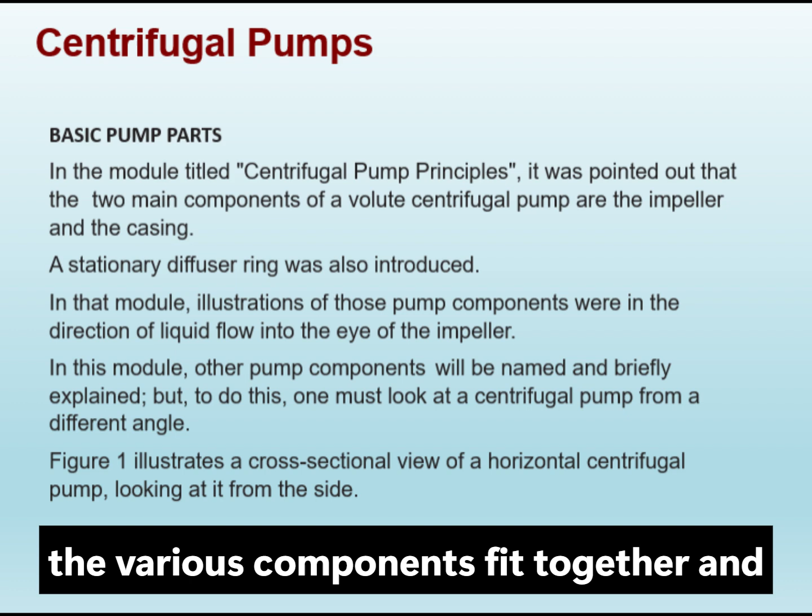In today's session, we will take a different approach and examine the pump from a cross-sectional side view. This perspective will allow us to see how all the various components fit together and interact within the pump assembly. Please direct your attention to Figure 1, which presents a cross-sectional view of a horizontal centrifugal pump as seen from the side. This diagram will serve as our primary reference throughout the remainder of this module.

Take a moment to familiarize yourselves with the general layout. You can see the casing forming the outer shell, the impeller mounted on the shaft at the center, and the various supporting components arranged around them. We will examine each of these components in detail as we progress through the session.

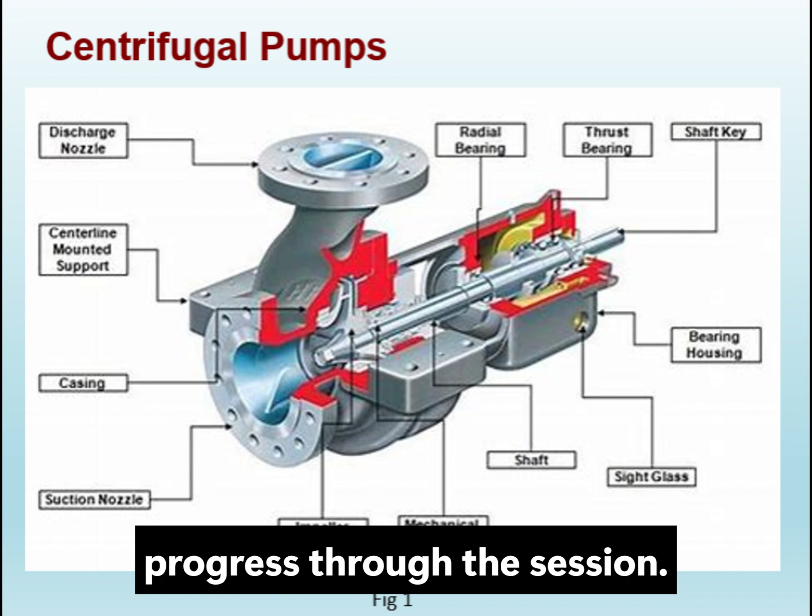Let us begin with the pump casing. The casing is the visible exterior structure of the pump and serves as the primary containment vessel. Most of the internal components, as well as the liquid being pumped, are enclosed within it.

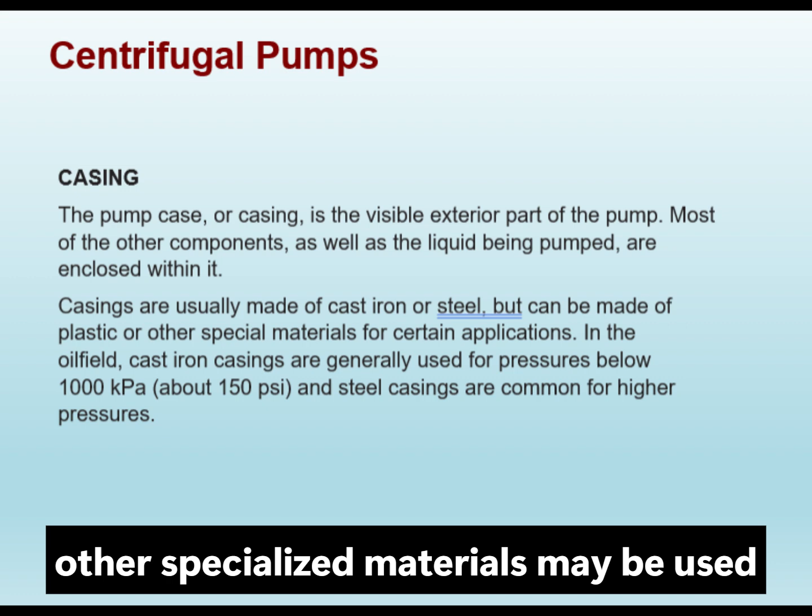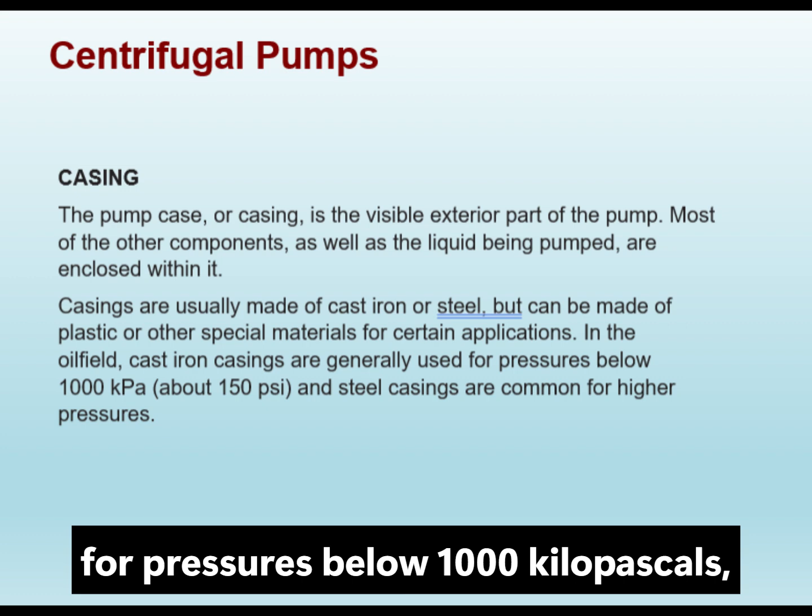Casings are manufactured from a variety of materials depending on the application. Cast iron and steel are the most common choices, although plastic and other specialized materials may be used in certain circumstances. In oil field applications, as a general guideline, cast iron casings are typically employed for pressures below 1,000 kilopascals, which is approximately 150 pounds per square inch. For higher pressure applications, steel casings are the standard choice.

Now, let us turn our attention to the impeller, which is arguably the most critical rotating component of the pump. The impeller is securely attached to the shaft and rotates at the same speed. There are three principal types of impellers, each with numerous design variations.

The open type features several blades attached directly to a central hub. The semi-open or semi-closed type incorporates a circular plate called a web on one side of the blades. The enclosed type, also referred to as a closed or shrouded impeller, has plates on both sides of the blades.

It is important to understand the performance trade-offs between these types. Closed impellers develop higher pressure, but have a lower flow rate and capacity. Open and semi-open impellers are better suited for pumping slurries, as larger particles can pass through more easily. In most oil field applications, impellers are manufactured from cast iron, though stainless steel, plastic, or other specialized materials may be used for corrosive or chemical service.

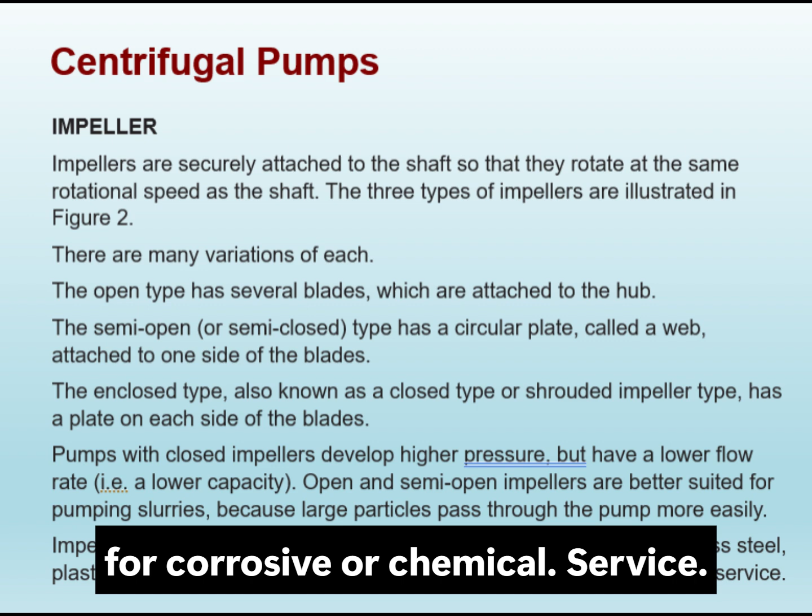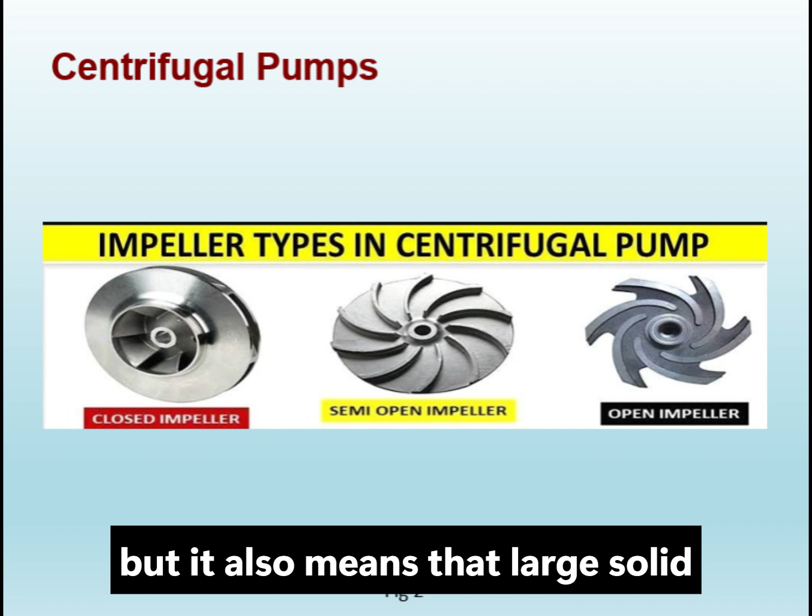Note how each successive design provides greater containment of the liquid flow path. This increased containment is what allows closed impellers to develop higher pressures, but it also means that large solid particles cannot pass through as easily.

The shaft is the component that transmits rotational energy from the driver to the impeller. It is typically connected directly to the driver through a coupling arrangement. Shafts are generally manufactured from steel to provide the necessary strength and rigidity.

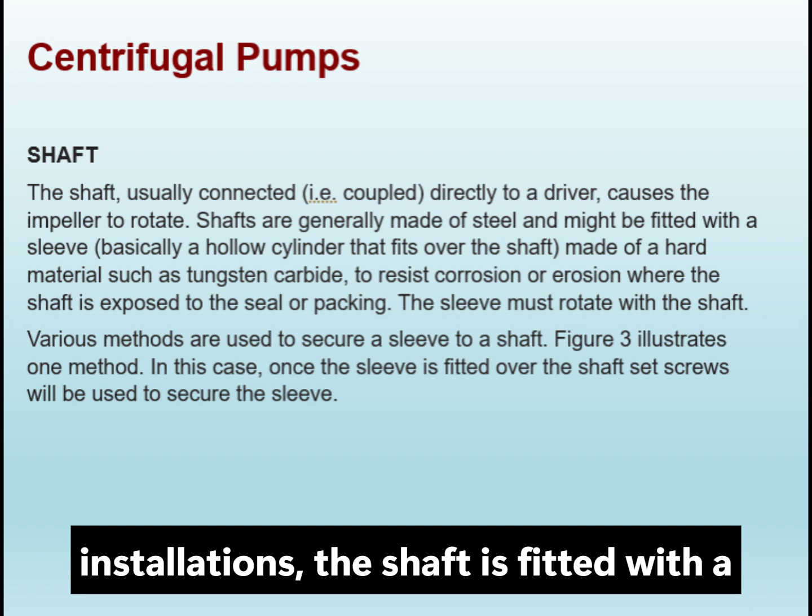In many installations, the shaft is fitted with a sleeve, which is essentially a hollow cylinder that fits over the shaft. These sleeves are typically made from a hard, wear-resistant material such as tungsten carbide. Their purpose is to protect the shaft from corrosion or erosion in the areas where it is exposed to the seal or packing. The sleeve must rotate with the shaft as a single unit.

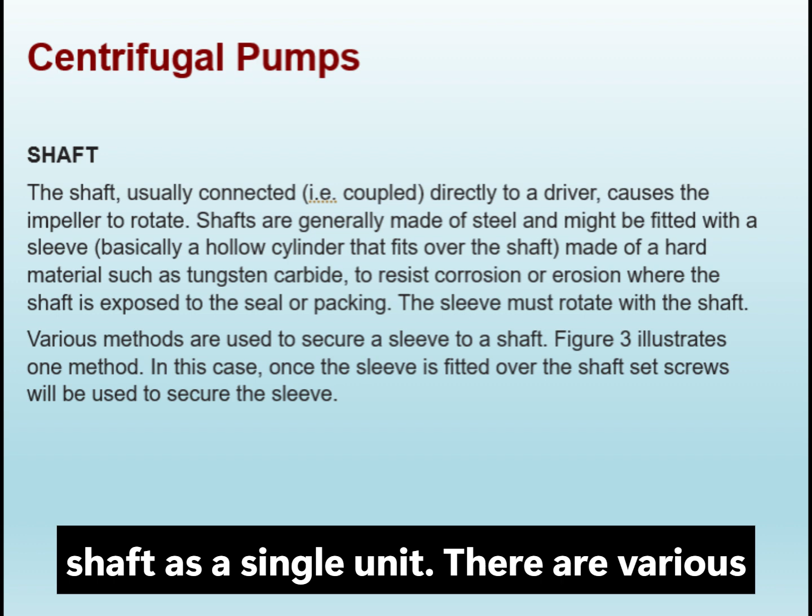There are various methods used to secure a sleeve to a shaft, and Figure 3 illustrates one such method using set screws. Continuing with shaft components, Figure 3 also illustrates another important method of securing rotating components to the outside of the shaft, using a device known as a key. In the illustration, you can see how the impeller is secured using this method.

A slot called a keyway is machined into the shaft, and a small piece of metal called a key is fitted tightly into this keyway.

The impeller hub is machined to slide over both the shaft and the key, creating a positive mechanical connection that prevents relative rotation between the shaft and impeller. Figure 4, which shows this arrangement from the end of the shaft, makes this relationship clearer.

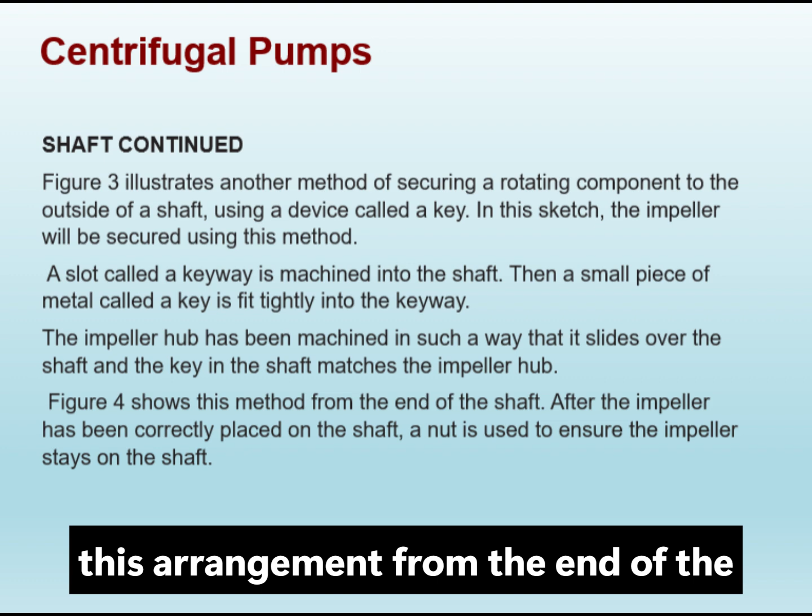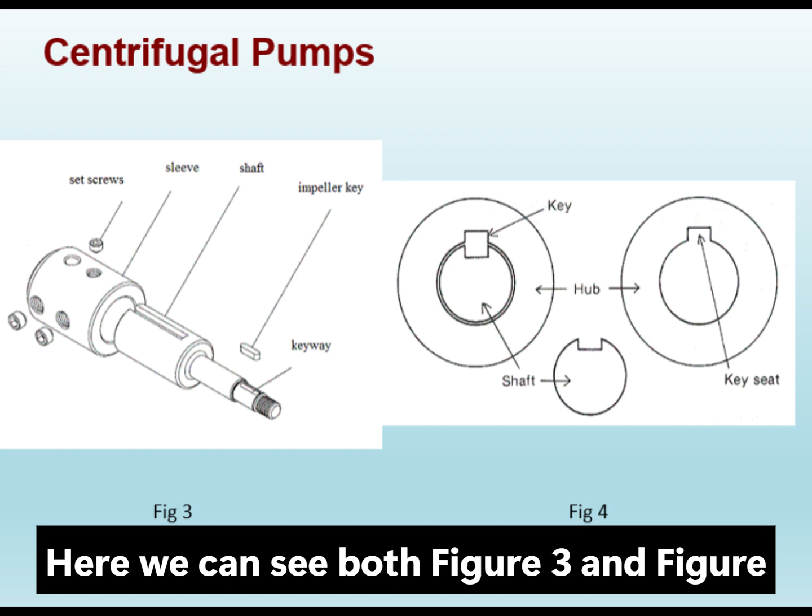Once the impeller has been correctly positioned on the shaft, a nut is used to ensure it remains securely in place. Here we can see both Figure 3 and Figure 4 together. Figure 3 shows the sleeve and key arrangement from a side perspective, while Figure 4 provides an end-on view of the shaft showing how the key fits into the keyway.

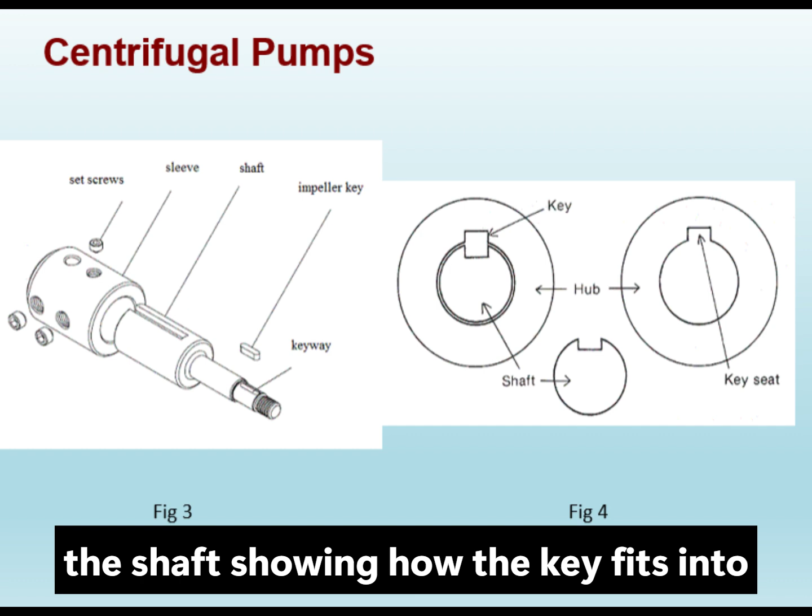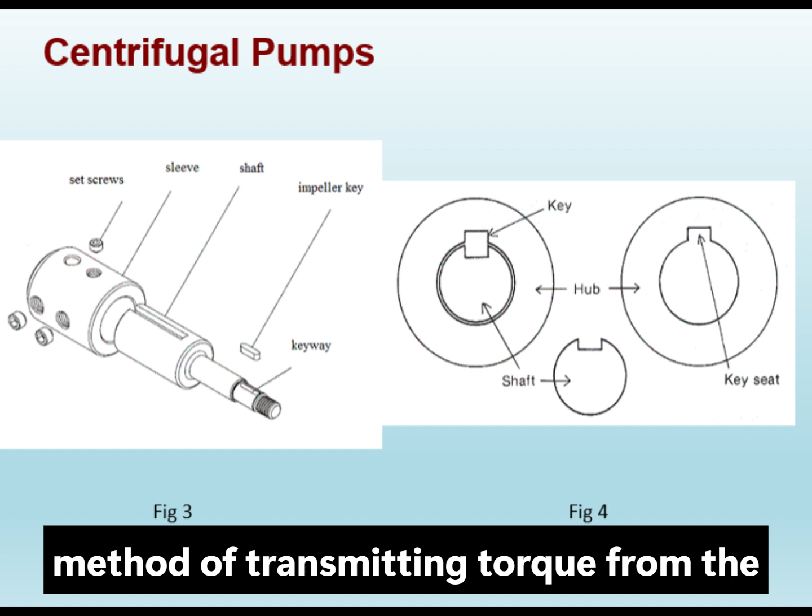Notice how the key creates a mechanical interlock between the shaft and the component being secured to it. This is a reliable and widely used method of transmitting torque from the shaft to the impeller while still allowing the impeller to be removed for maintenance when necessary.

We now move on to an important protective component, the wear ring. Once a pump is assembled, there is very little clearance between the impeller and the casing. If the impeller were to make contact with the casing during operation, the resulting damage could be extremely costly.

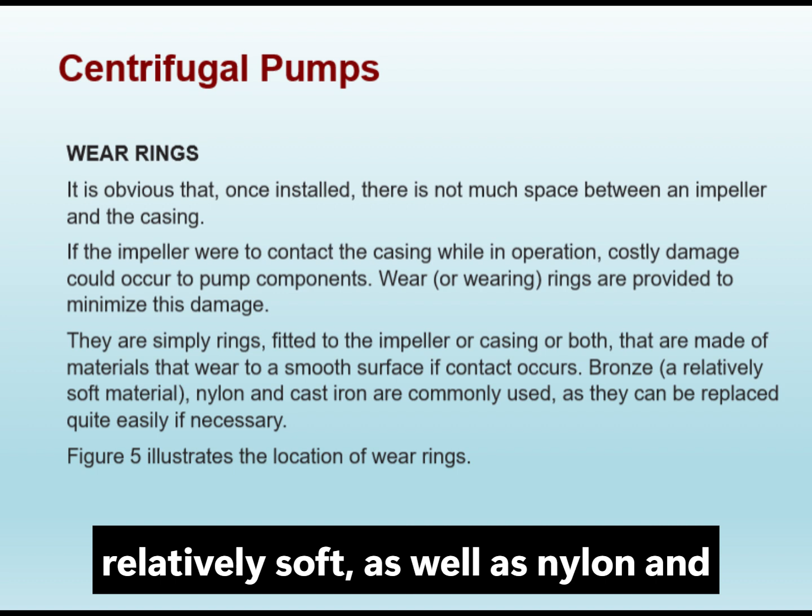Wear rings, sometimes called wearing rings, are designed to minimize such damage. They are fitted to the impeller, the casing, or both, and are made from materials that wear to a smooth surface if contact occurs. Common materials include bronze, which is relatively soft, as well as nylon and cast iron. These materials are chosen because they can be replaced quite easily when they become worn.

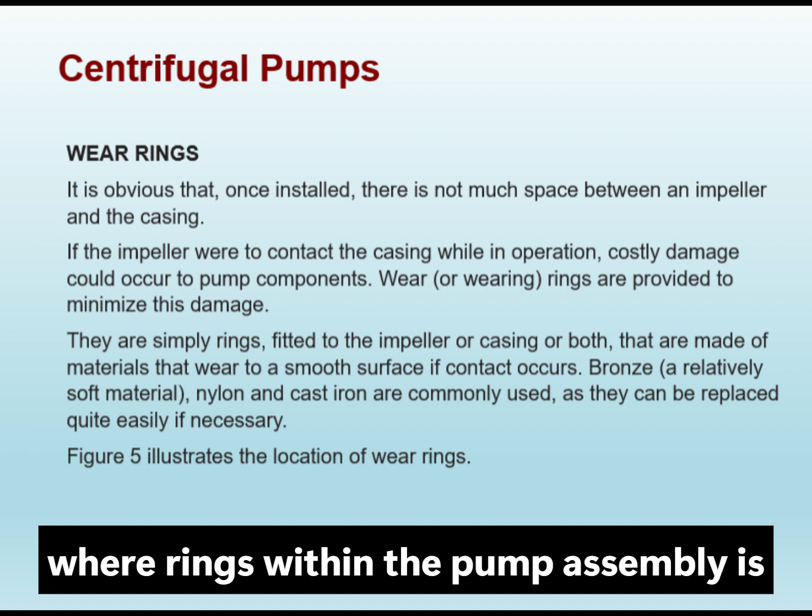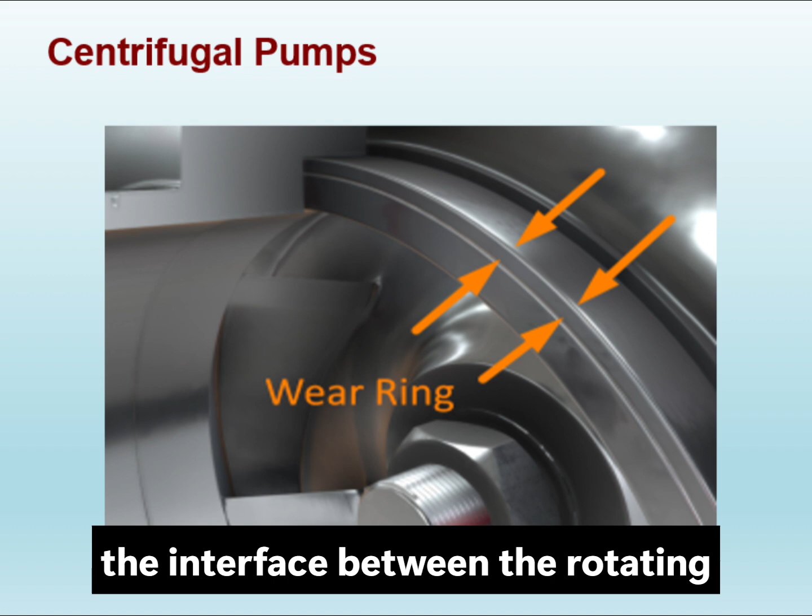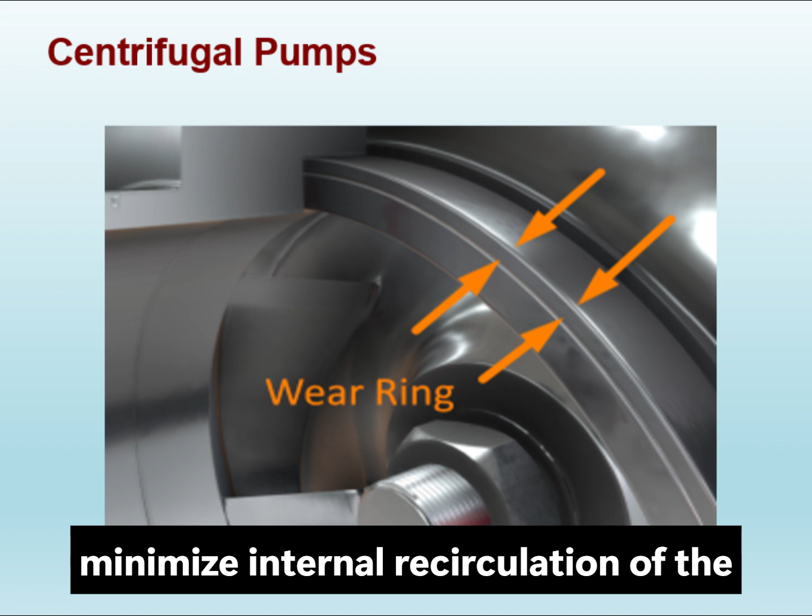Their precise location is critical to pump performance, as they must maintain a very small but consistent clearance to minimize internal recirculation of the pumped liquid whilst preventing metal-to-metal contact between the impeller and casing.

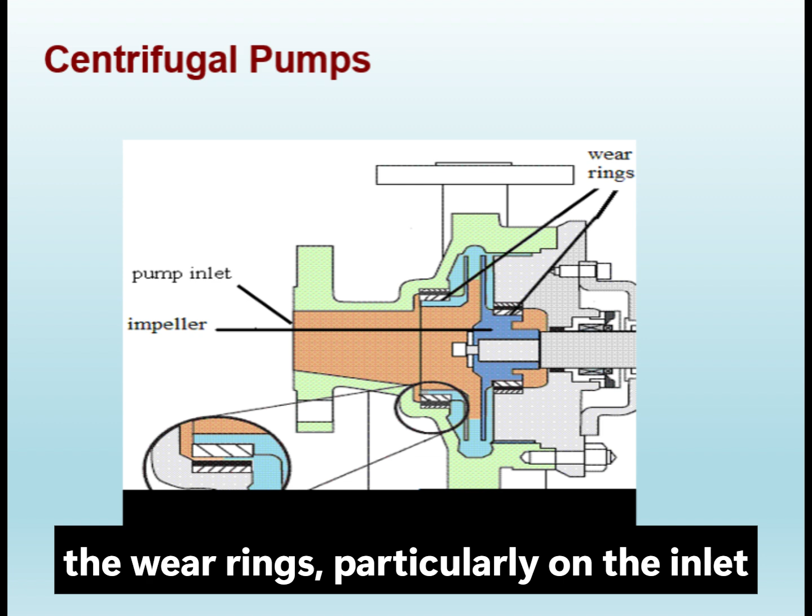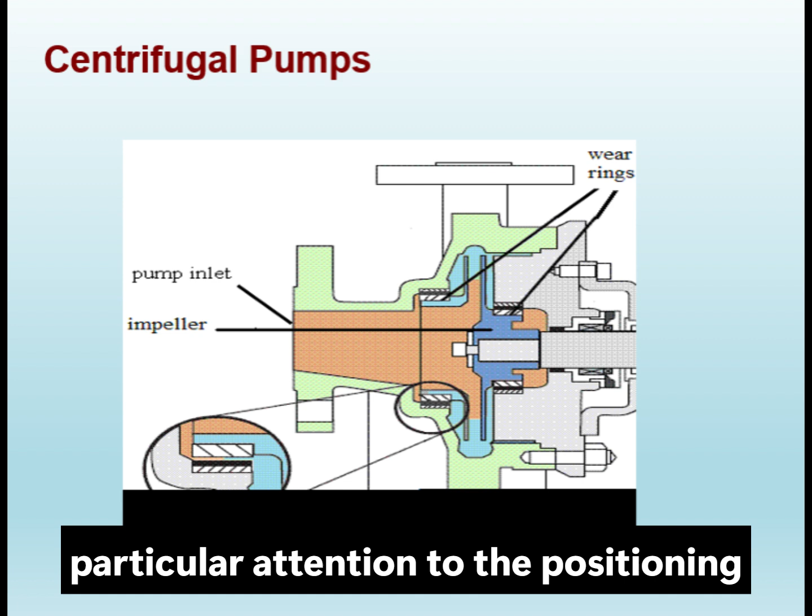Figure 6 provides a more detailed view of the wear rings, particularly on the inlet side of the impeller. This closer view allows us to see how the rings create a controlled clearance between the rotating and stationary components. Pay particular attention to the positioning on the suction side, as we will discuss their additional function at this location on the next slide. Referring back to Figure 6, notice the wear rings on the inlet side of the impeller.

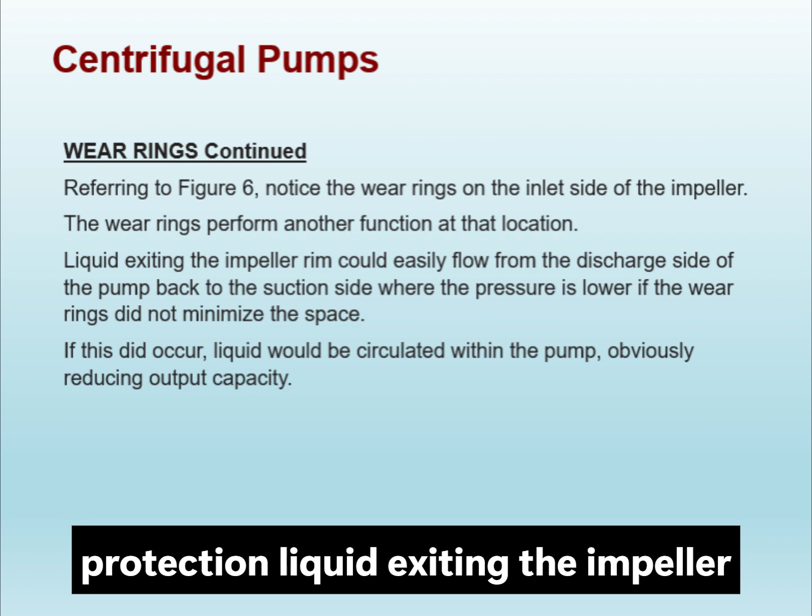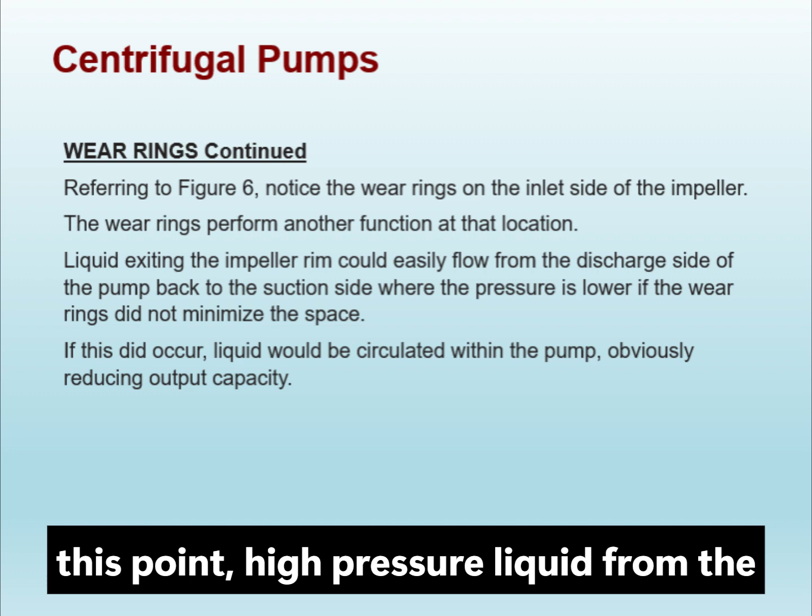At this location, the wear rings perform an additional and very important function beyond simple wear protection. Liquid exiting the impeller rim is at a higher pressure than the liquid at the suction side. Without the wear rings minimizing the clearance at this point, high-pressure liquid from the discharge side would flow back to the lower-pressure suction side. If this recirculation were to occur, liquid would simply circulate within the pump rather than being discharged.

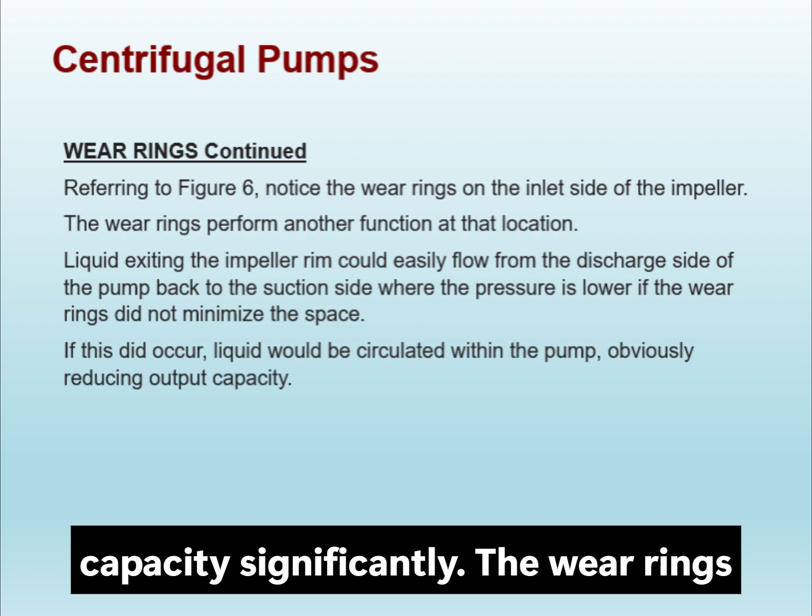This would obviously reduce the pump's output capacity significantly. The wear rings therefore act as a seal to minimize this internal leakage.

Let us now discuss pump bearings. Bearings are essential components that serve several critical functions within the pump. First, they support the weight of the shaft and impeller assembly. Second, they ensure smooth shaft rotation. Without proper bearing support, vibration would occur and could cause significant damage to the pump.

Third, they prevent lateral movement of the shaft, ensuring that the rotating parts do not come into contact with the pump casing. And fourth, they prevent axial movement of the shaft caused by thrust forces that develop in many types of pumps.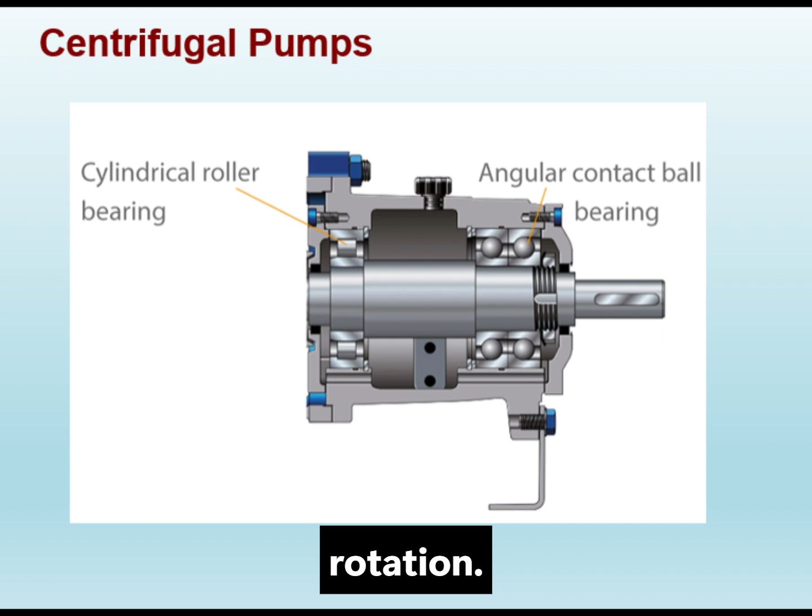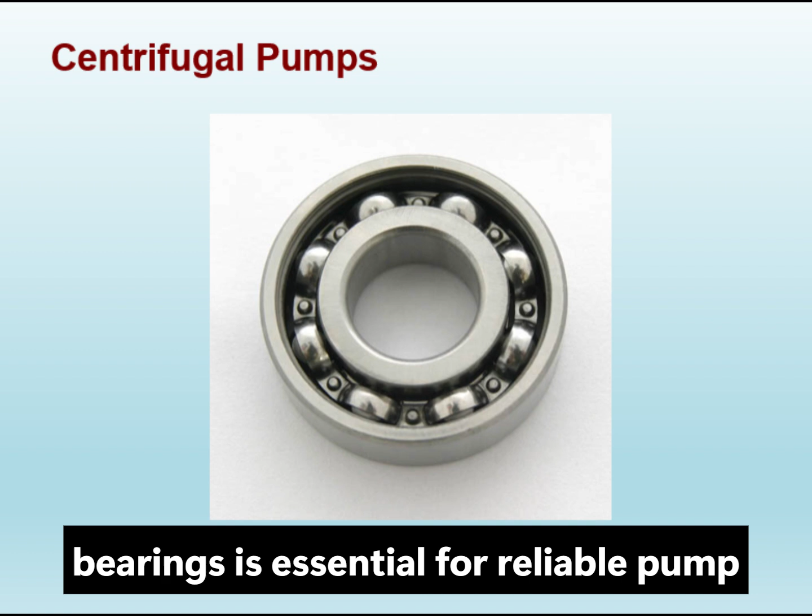Figure 8 provides another view of a ball bearing arrangement, showing how it is typically installed within a pump. Note how the bearing is positioned to support the shaft whilst allowing free rotation. Proper installation and alignment of bearings is essential for reliable pump operation and extended service life.

Figure 9 depicts a double angular contact bearing. This type of bearing is designed to handle both radial and axial loads simultaneously. The angular contact surfaces of the bearing allow it to support thrust forces in addition to the weight of the rotating assembly.

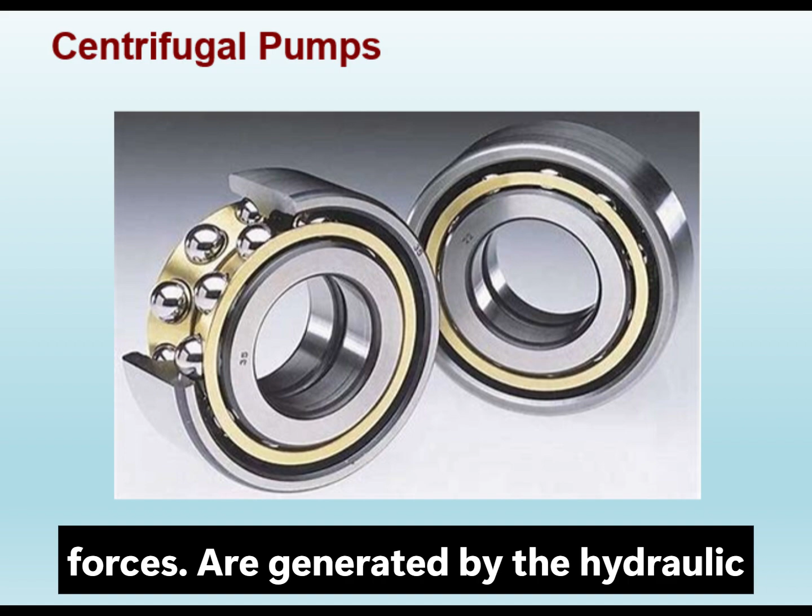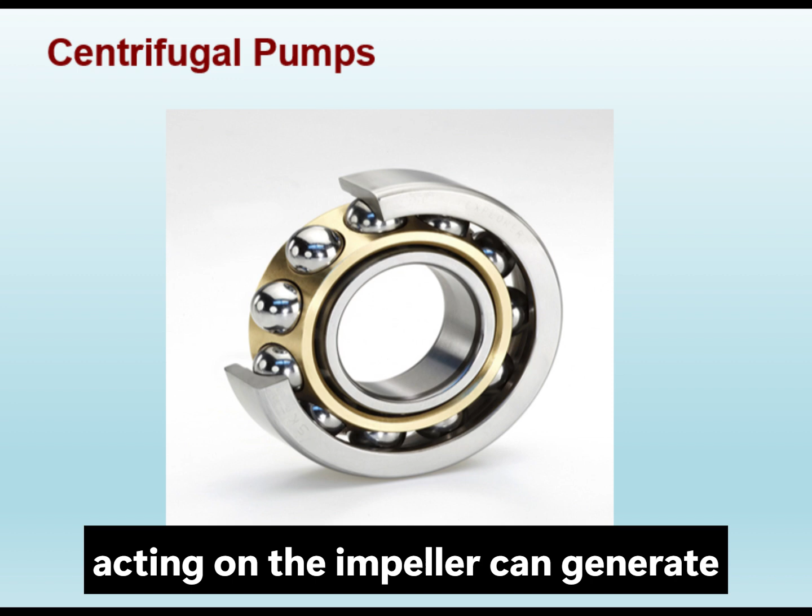These bearings are particularly useful in pump applications where significant axial forces are generated by the hydraulic action of the impeller. Figure 10 shows a thrust-type bearing. As the name implies, this bearing is specifically designed to handle axial loads, or thrust, along the shaft. In a centrifugal pump, hydraulic forces acting on the impeller can generate substantial axial thrust that must be absorbed by the bearing arrangement.

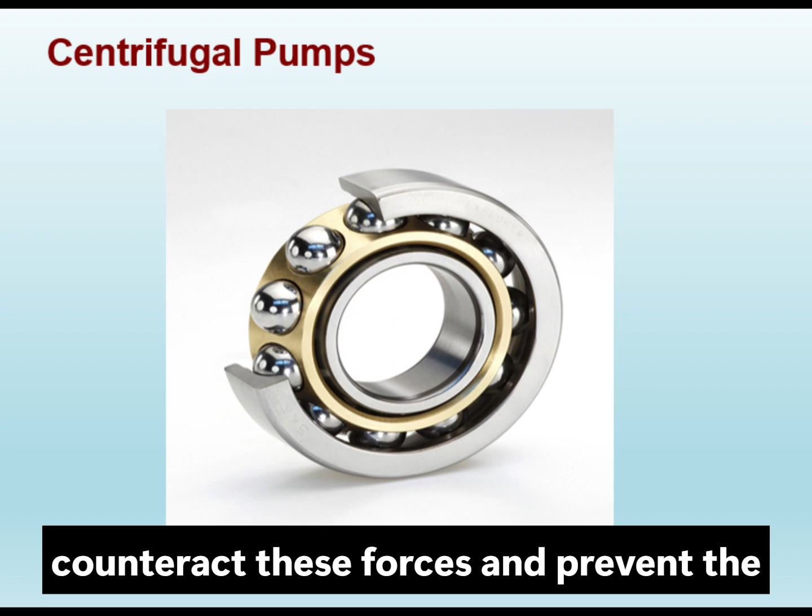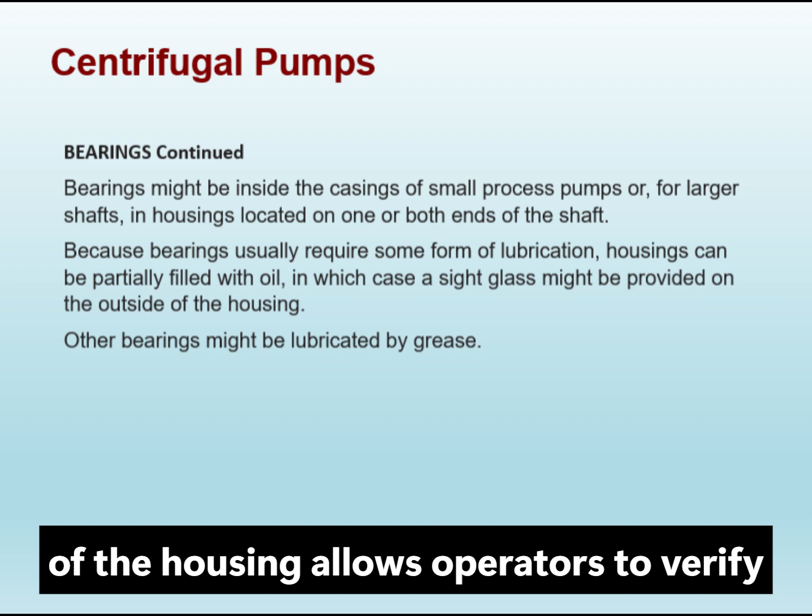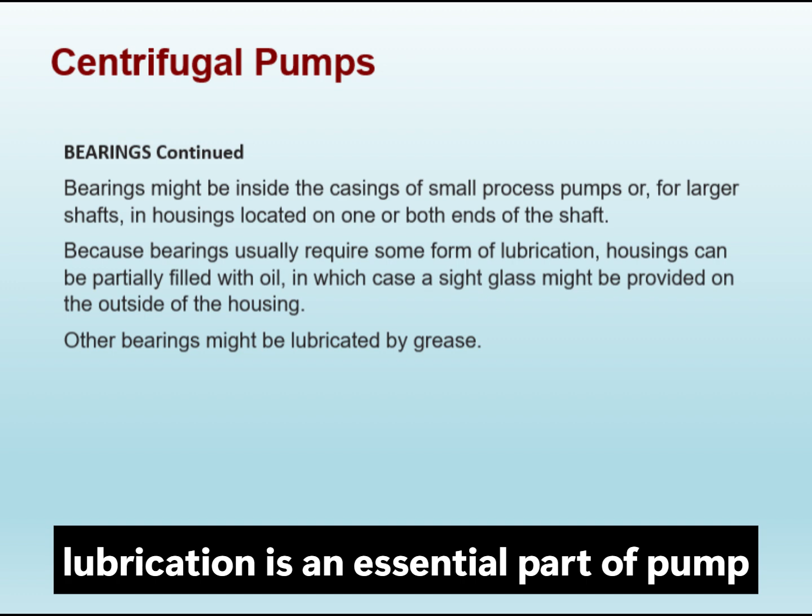Thrust bearings are positioned to counteract these forces and prevent the shaft from moving axially within the pump. To conclude our discussion of bearings, it is worth noting their physical location and lubrication requirements. In smaller process pumps, bearings may be located inside the pump casing itself. For larger pumps with bigger shafts, bearings are typically housed in separate bearing housings located at one or both ends of the shaft. Because bearings require lubrication to function properly and extend their service life, these housings are often partially filled with oil. A sight glass on the outside of the housing allows operators to verify the oil level without disassembly. Other bearing arrangements may use grease rather than oil for lubrication. Regular monitoring of bearing condition and lubrication is an essential part of pump maintenance.

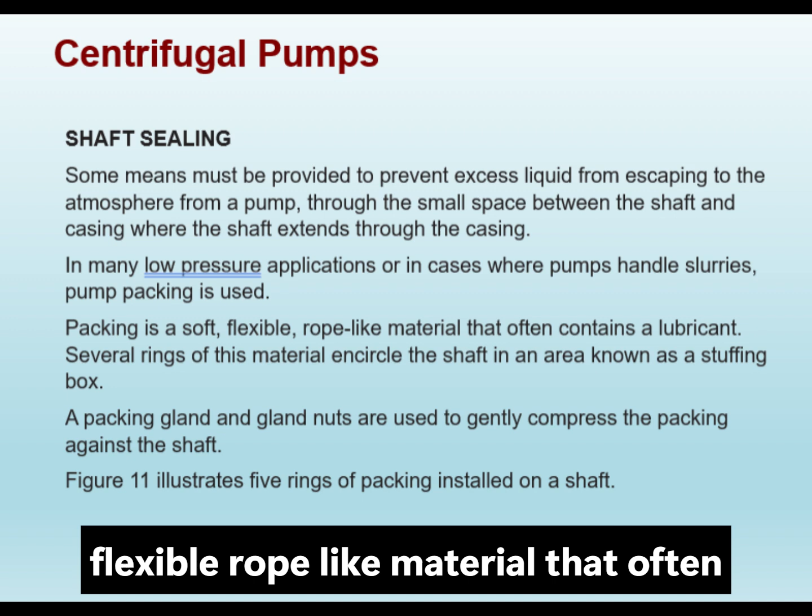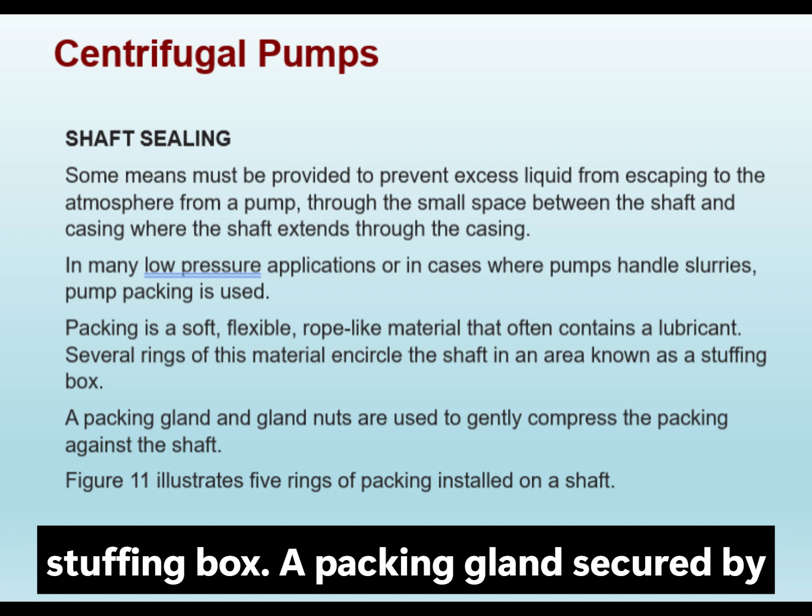In many low-pressure applications, or where pumps handle slurries, pump packing is used as the sealing method. Packing is a soft, flexible, rope-like material that often contains a lubricant. Several rings of this packing material are placed around the shaft in an area known as the stuffing box. A packing gland, secured by gland nuts, is used to gently compress the packing against the shaft, creating a seal. Figure 11 illustrates 5 rings of packing installed on a shaft.

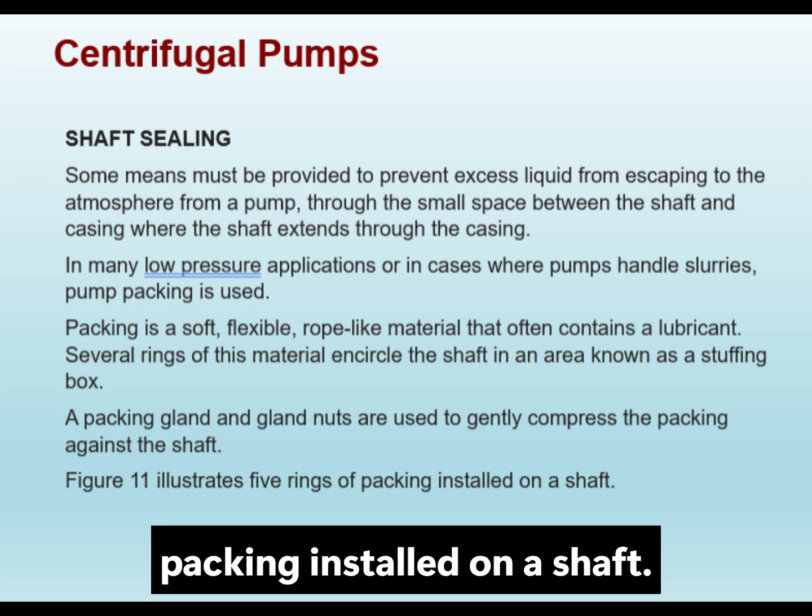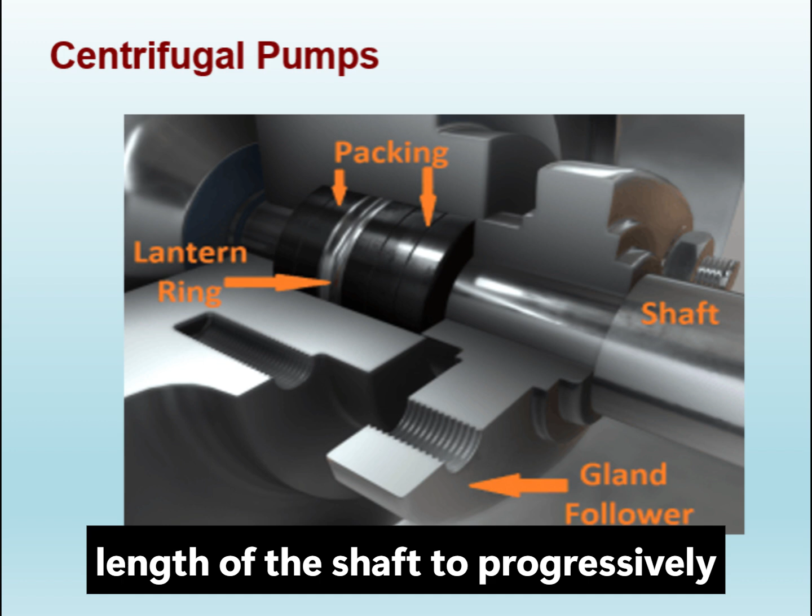Figure 11 shows the arrangement of packing rings around the shaft within the stuffing box. You can see how the individual rings of packing material are stacked around the shaft and how the packing gland at the outer end compresses them. Note also the position of the lantern ring, which we will discuss in more detail shortly. The key point to observe is how the packing creates multiple sealing surfaces along the length of the shaft to progressively reduce leakage. An important characteristic of packing to understand is that, because it does not rotate with the shaft yet remains in constant contact with it, packing generates heat through friction.

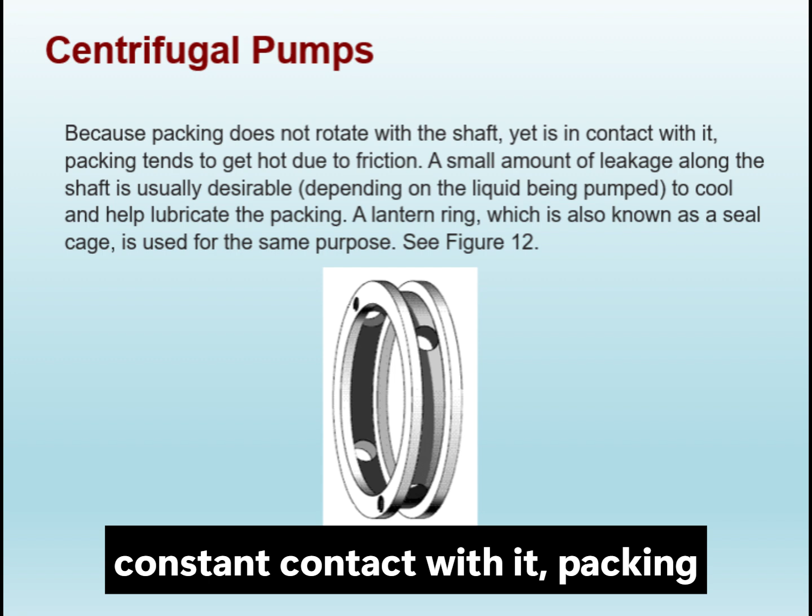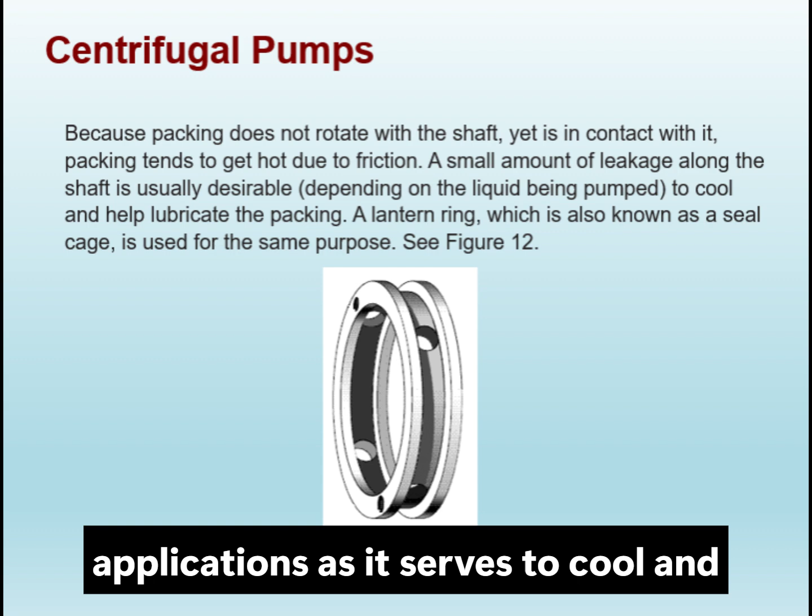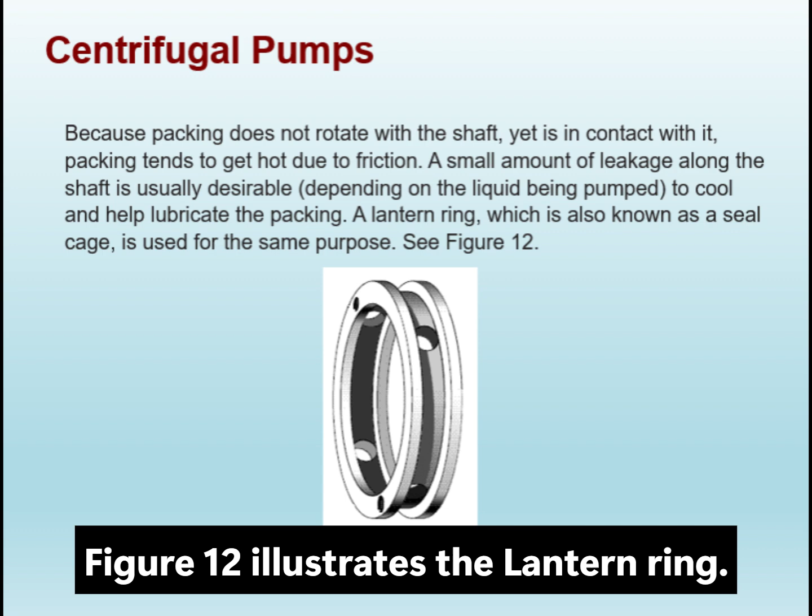For this reason, a small amount of leakage along the shaft is actually desirable in most applications, as it serves to cool and lubricate the packing. A component called a lantern ring, also known as a seal cage, serves the same purpose. Figure 12 illustrates the lantern ring. This component ensures that cooling and lubricating liquid reaches the packing, extending its service life and preventing excessive heat buildup.

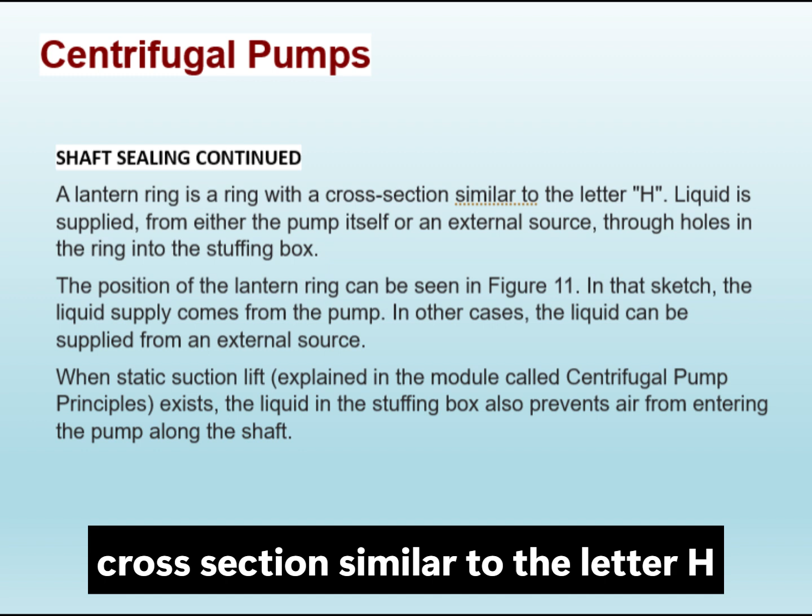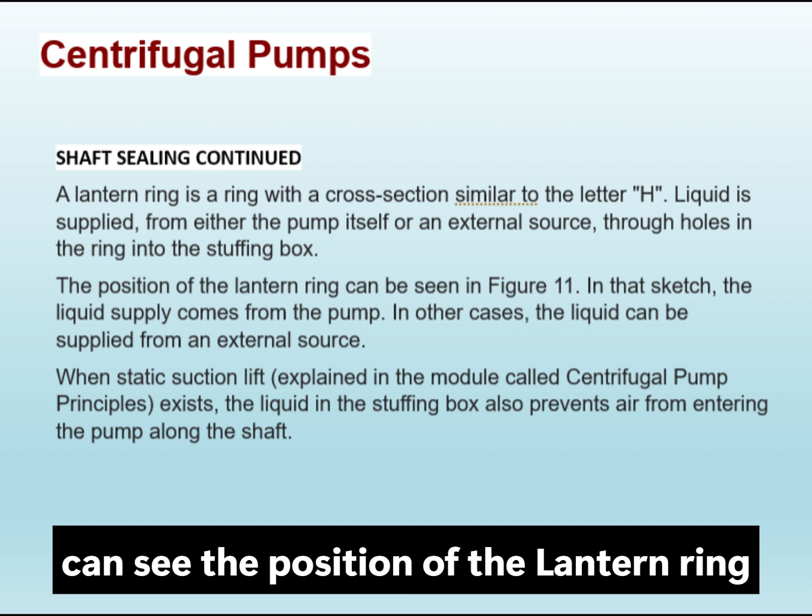Let us examine the lantern ring in greater detail. The lantern ring has a cross-section similar to the letter H. Liquid is supplied through holes in the ring into the stuffing box, either from the pump itself or from an external source. Referring back to Figure 11, you can see the position of the lantern ring within the packing arrangement. In that particular sketch, the liquid supply comes from the pump's own discharge pressure. In other configurations, the liquid may be supplied from an external source.

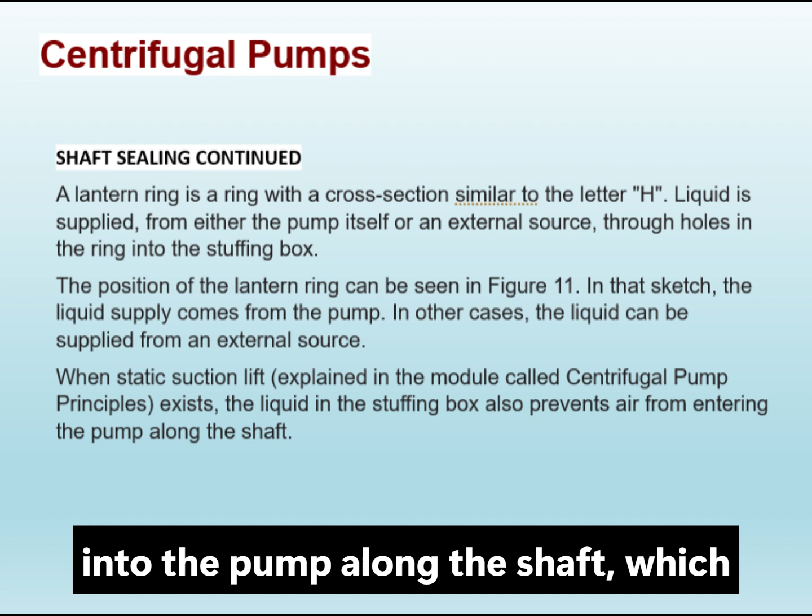An additional function of the lantern ring is particularly important when static suction lift conditions exist, as discussed in the earlier module on centrifugal pump principles. In those situations, the liquid in the stuffing box also prevents air from being drawn into the pump along the shaft, which would cause the pump to lose its prime.

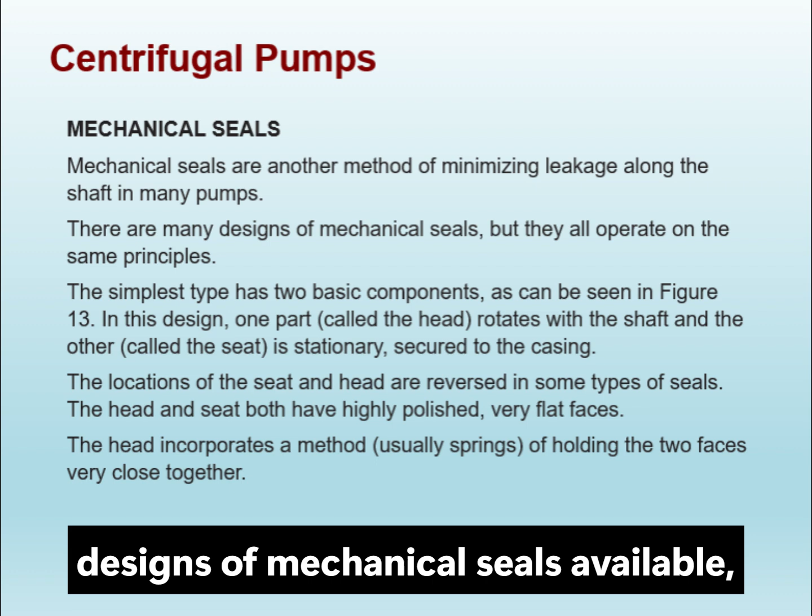Mechanical seals represent a more advanced method of minimizing leakage along the shaft. While there are many designs of mechanical seals available, they all operate on the same fundamental principles. The simplest type consists of 2 basic components, as shown in Figure 13. One part, called the head, rotates with the shaft. The other part, called the seat, is held stationary and is secured to the casing. In some seal designs, the positions of the seat and head are reversed.

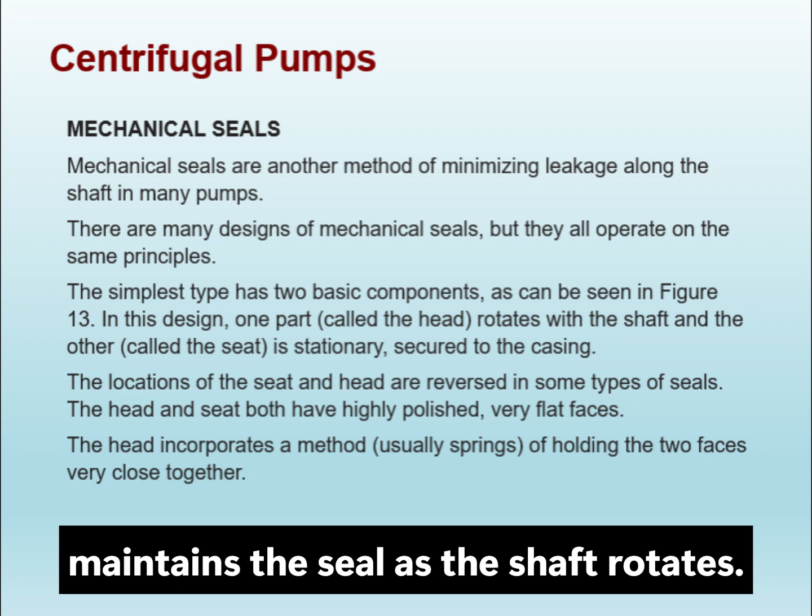Both the head and seat have highly polished, extremely flat faces that interface with each other. The head incorporates a mechanism, typically springs, that holds the 2 faces in very close proximity to each other. This spring-loaded arrangement is what maintains the seal as the shaft rotates. It is important to understand how mechanical seal faces actually work. Although the faces are extremely smooth, they do not actually touch each other during operation. Direct contact would generate excessive heat from friction.

Instead, a very small gap between the two faces allows a minute amount of liquid to separate and cool them. This leakage may be so small that it is measured in drops per hour. Depending on the liquid being pumped, there may be slight visible leakage outside the seal, or the liquid may vaporize completely, giving the false impression that the seal has eliminated leakage entirely.

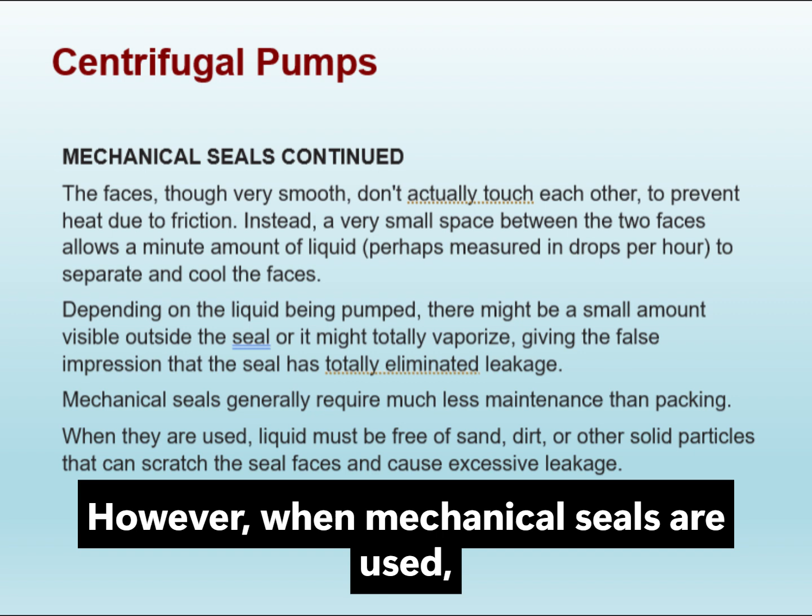Mechanical seals offer significant advantages over packing in that they generally require much less maintenance. However, when mechanical seals are used, the pumped liquid must be free of sand, dirt, or other solid particles that could scratch the seal faces and cause excessive leakage.

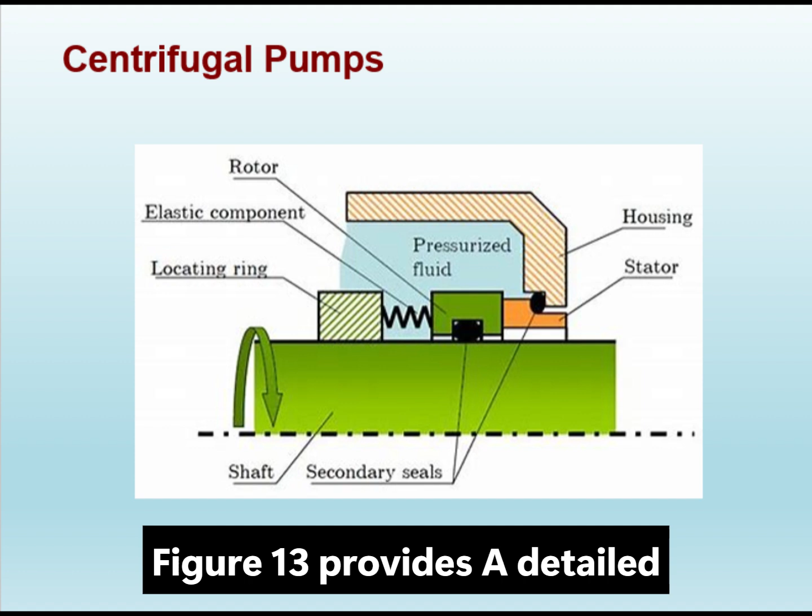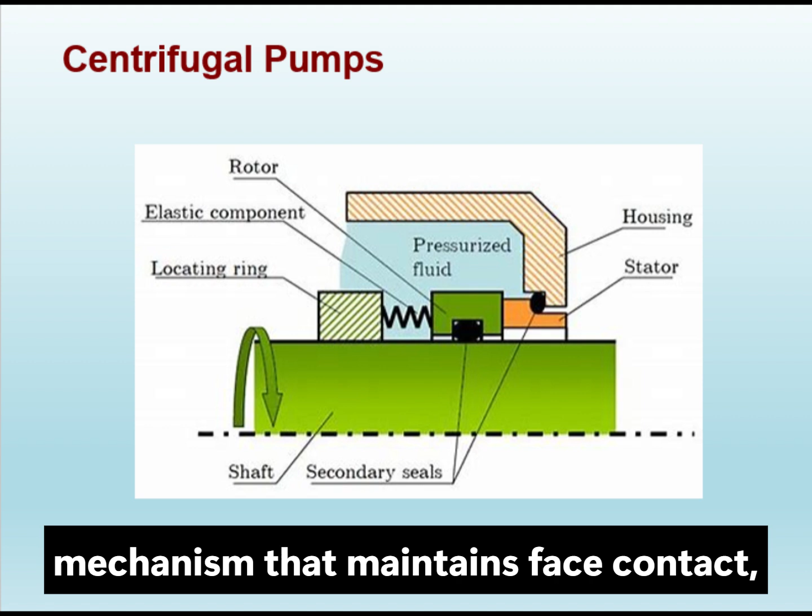Figure 13 provides a detailed illustration of a basic mechanical seal assembly. You can identify the rotating head, the stationary seat, the spring mechanism that maintains face contact, and the O-rings or secondary seals that prevent leakage around the components themselves.

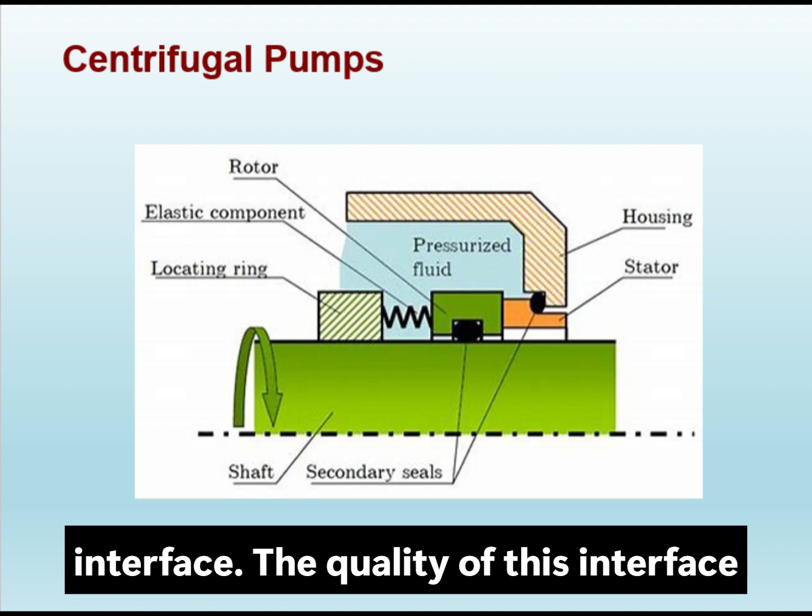Note how the two polished faces meet at a precise interface. The quality of this interface is critical to seal performance, and even minor damage to either face will result in increased leakage. Figure 14 shows another view of a mechanical seal arrangement, providing additional perspective on how the seal components integrate with the pump shaft and casing.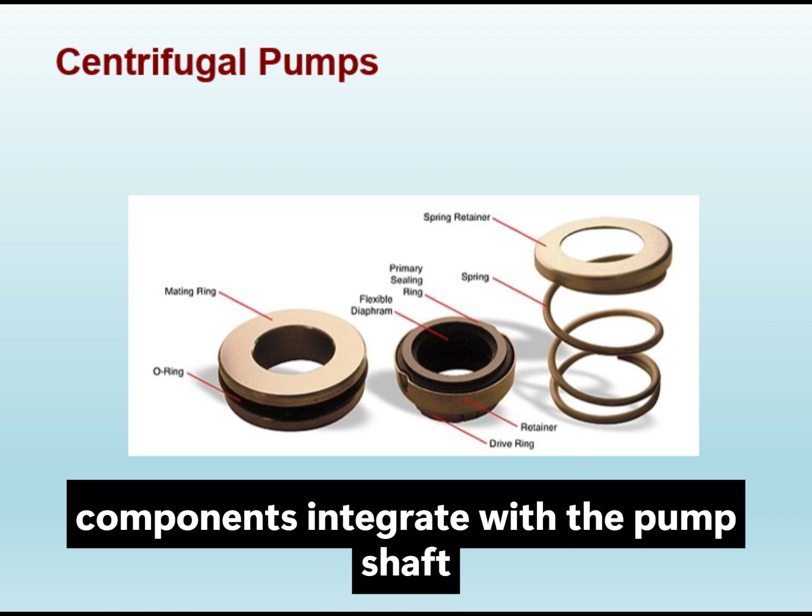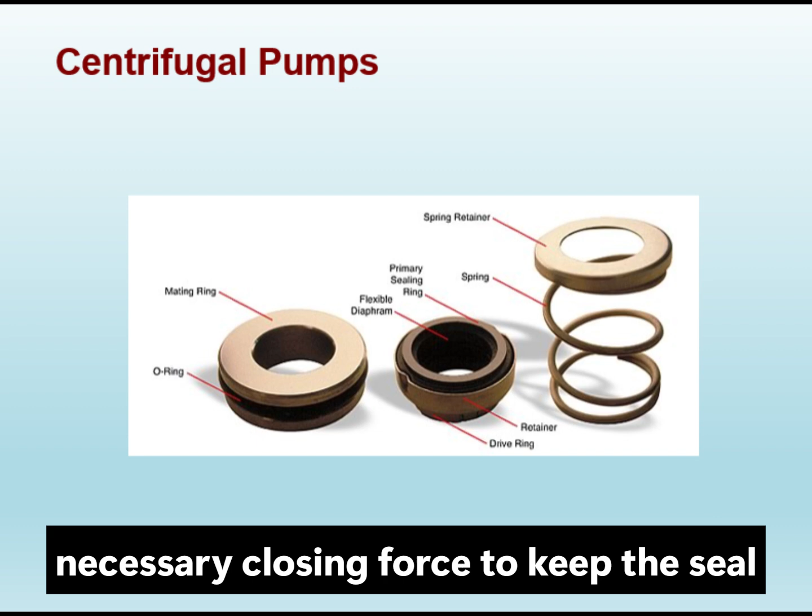This illustration helps to visualize how the seal assembly fits within the overall pump structure and how the spring mechanism applies the necessary closing force to keep the seal faces in proper alignment during operation.

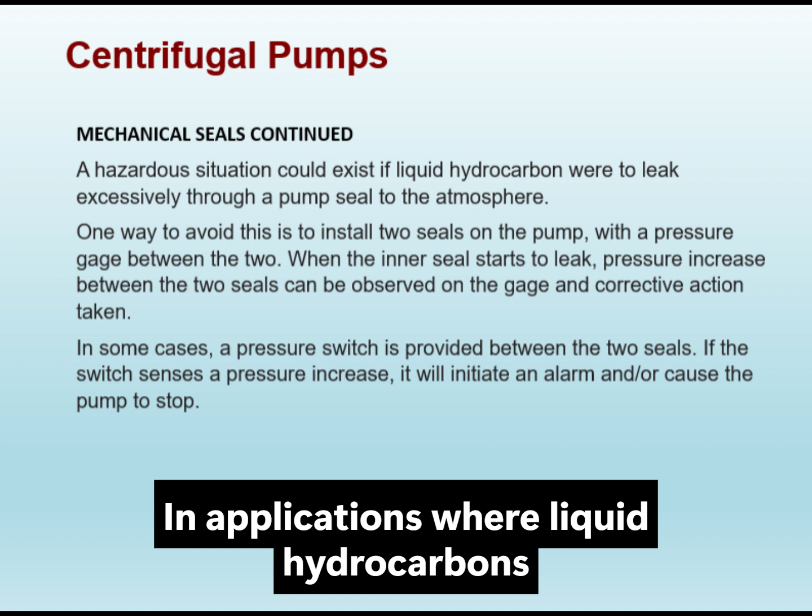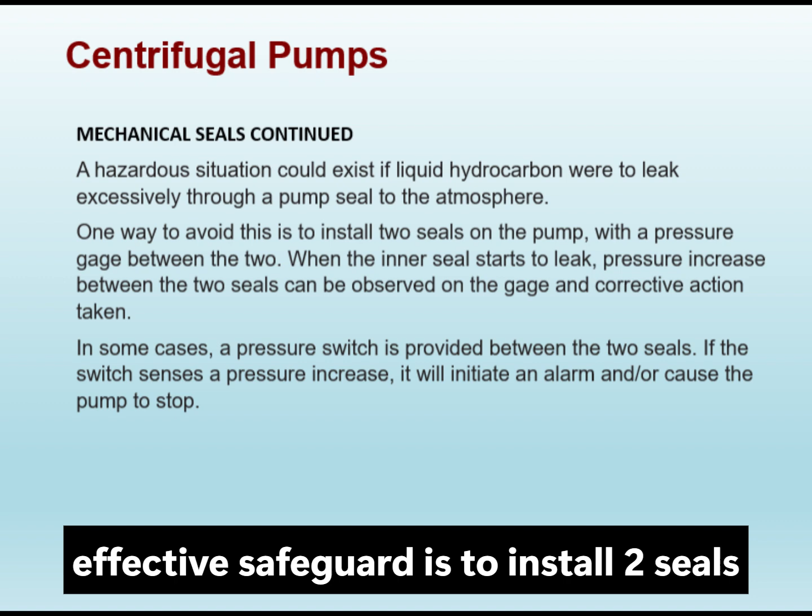This brings us to an important safety consideration regarding mechanical seals. In applications where liquid hydrocarbons are being pumped, excessive leakage through a pump seal to the atmosphere could create a hazardous situation. One effective safeguard is to install two seals on the pump in a tandem or dual arrangement, with a pressure gauge fitted between them.

Under normal operating conditions, the space between the two seals is at a known pressure. If the inner seal begins to leak, the pressure between the two seals will increase, and this change can be observed on the gauge, allowing operators to take corrective action before a dangerous situation develops.

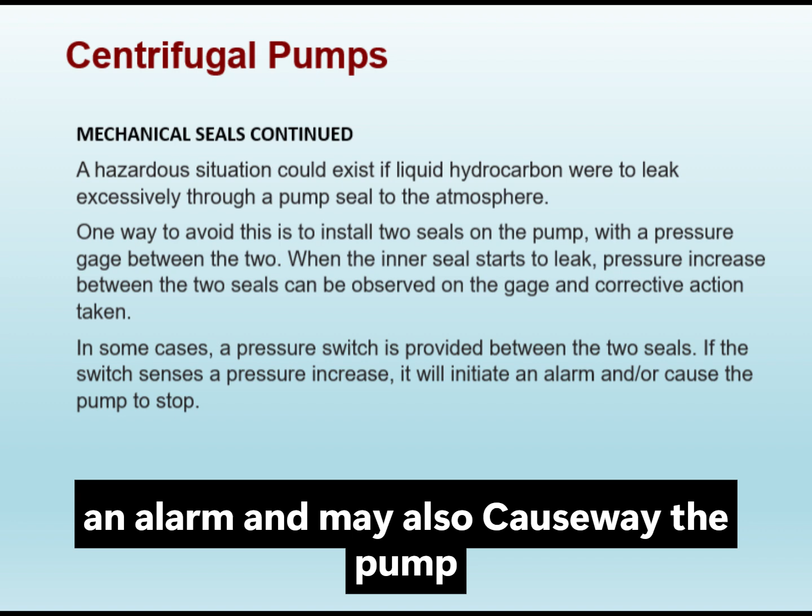In some installations, a pressure switch is provided between the two seals. If the switch detects a pressure increase above a predetermined threshold, it will automatically initiate an alarm and may also cause the pump to shut down. These dual seal arrangements are standard practice in many oil field and petrochemical applications.

The final major component we will discuss is the coupling. Couplings are used to connect the pump shaft to the shaft of the driver, which is typically an electric motor. Their purpose is to transmit rotational power from the driver to the pump.

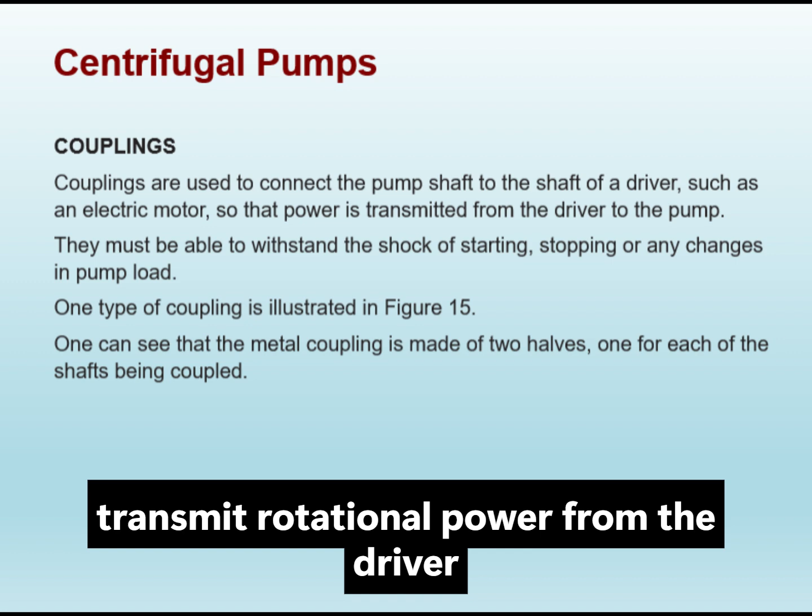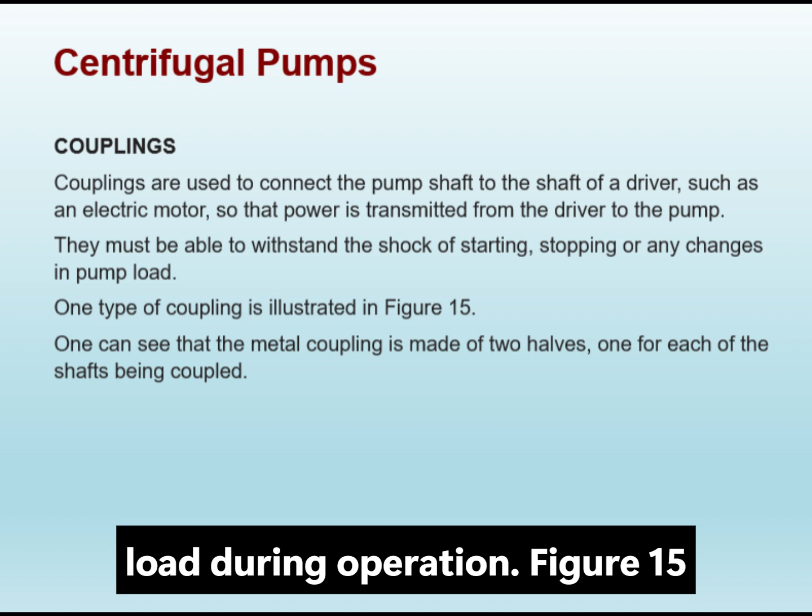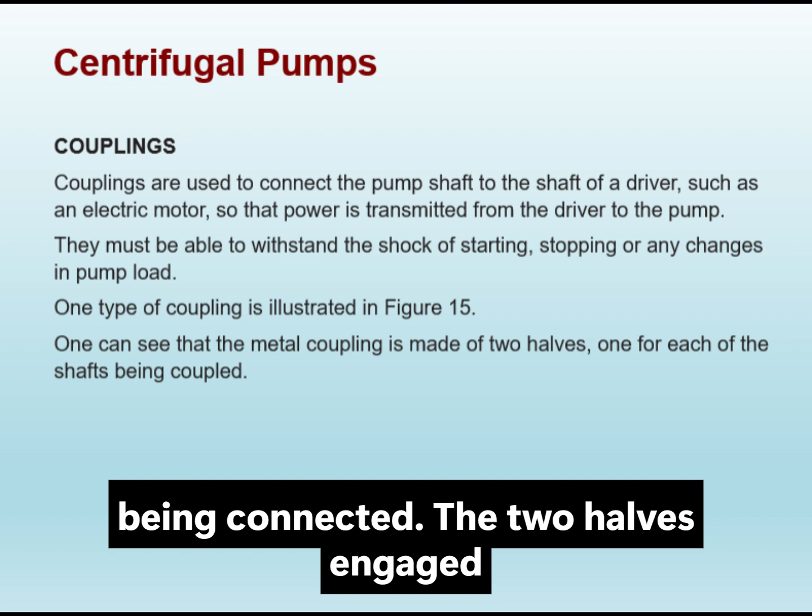Couplings must be robust enough to withstand the shock loads associated with starting and stopping the pump, as well as any changes in pump load during operation. Figure 15 illustrates one common type of coupling. As you can see, the coupling consists of two halves, one fitted to each of the shafts being connected. The two halves engage with each other to transmit torque whilst accommodating minor misalignment between the driver and pump shafts.

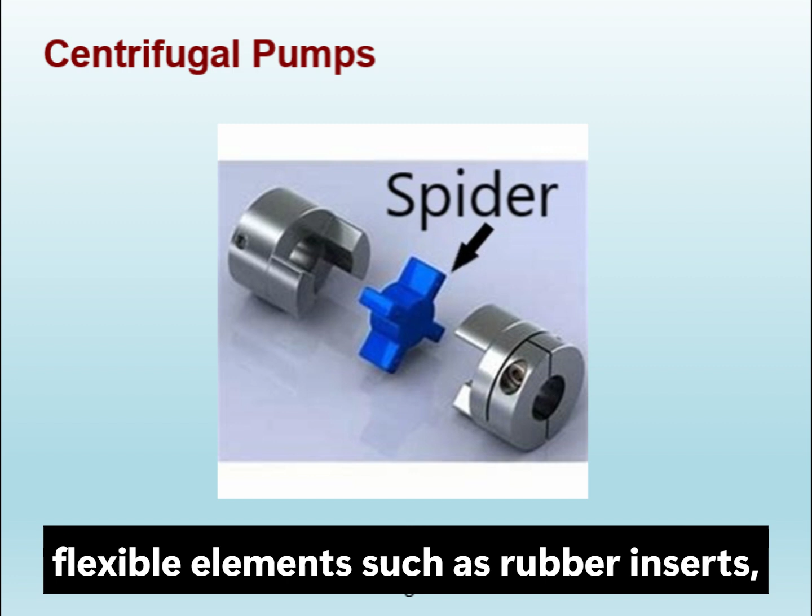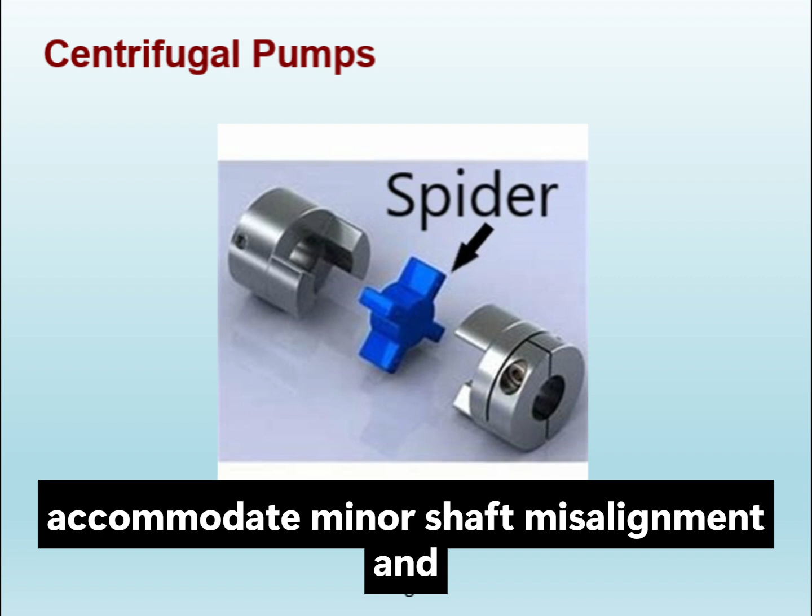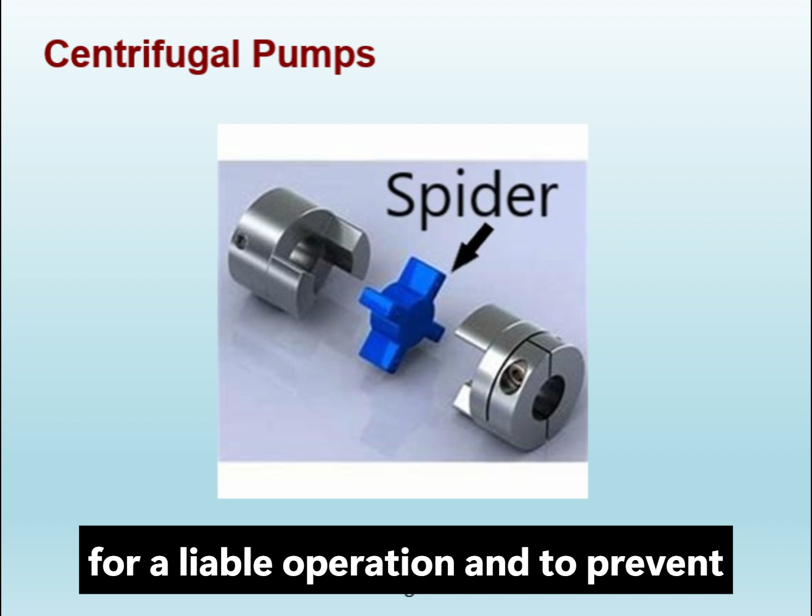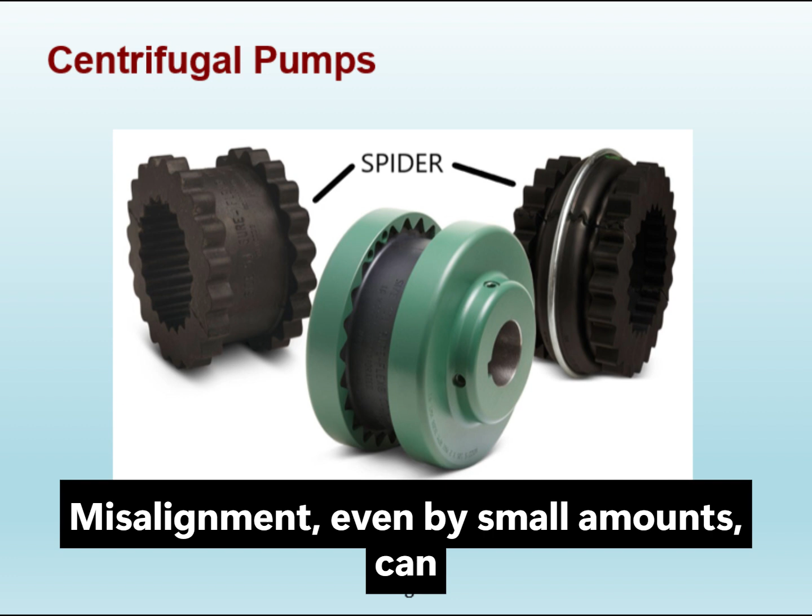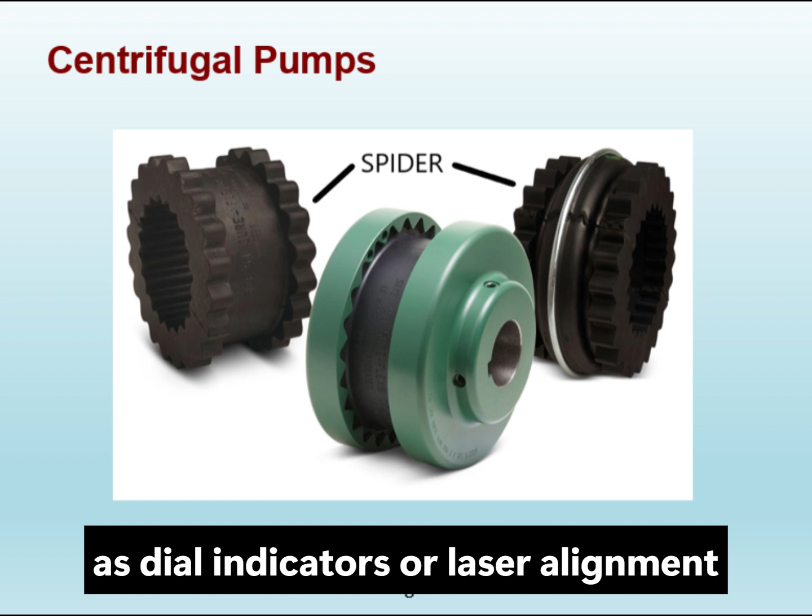Misalignment, even by small amounts, can lead to excessive vibration, premature bearing failure, seal damage, and increased energy consumption. In practice, precision alignment tools such as dial indicators or laser alignment systems are used to ensure the driver and pump shafts are properly aligned before the pump is placed into service.

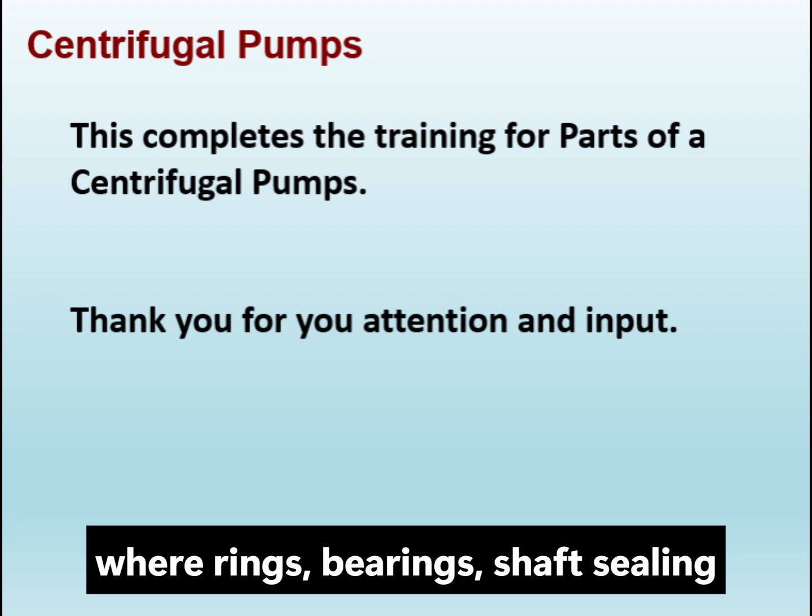This concludes our training module on the parts of a centrifugal pump. We have covered all of the major components, including the casing, impeller, shaft, wear rings, bearings, shaft sealing methods including both packing and mechanical seals, and couplings. Each of these components plays a vital role in the overall operation of the pump, and understanding their functions and interrelationships is essential for effective pump operation, maintenance, and troubleshooting.